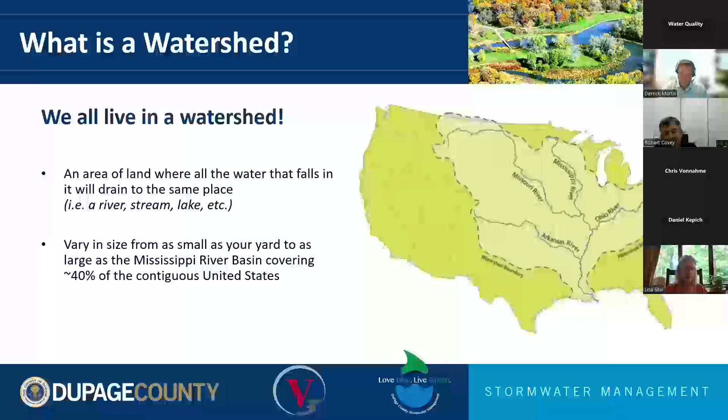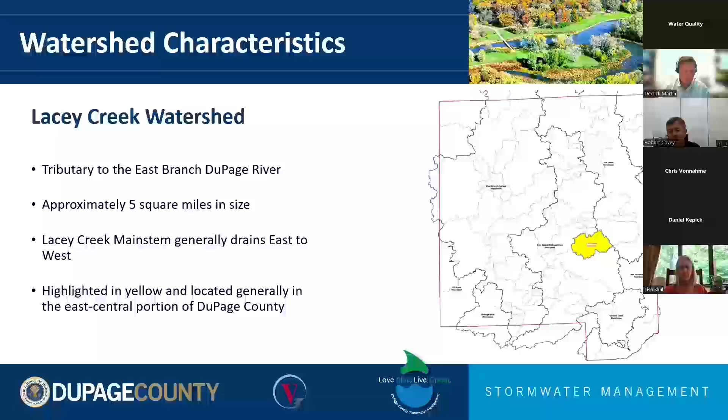The primary stakeholders for this watershed included the communities of Downers Grove, Lombard, and Oak Brook, as well as unincorporated DuPage County. Other stakeholders included the DuPage County Division of Transportation, the DuPage County Forest Preserve District, the Morton Arboretum, as well as Midwestern University. 2 stakeholder meetings were previously held with primary landowners as well as significant partners in the watershed planning process. The purpose of the stakeholder meetings was to gather data and fully understand any problem areas within the watershed and to collaborate on any proposed alternatives or solutions.

Similar to other watershed plans developed by our department, the goals of the watershed plan include the following: mitigate the effects of urbanization on stormwater drainage, reduce damages caused by flood events, maintain or improve water quality in the streams, protect the function of all wetland and floodplain areas. In total, watershed plans have been developed for over 70% of DuPage County. Our department has also developed water quality only watershed plans throughout the county, which have as their primary goal improving water quality and reducing impairments to our waterways.

The primary purpose of the Lacey Creek Watershed Plan is to define watershed issues and identify potential solutions that will reduce and prevent future flood damages. The Watershed Plan also seeks to engage the public and stakeholders, inventory the watershed resources and physical system, including drainageways, wetlands, riparian areas, recreation areas, and flood management facilities.

Identify flood problems. When identifying flood problems, it is important to note that our watershed plans do not look into and investigate flooding and drainage concerns on a micro scale or for one or two parcels only. The plan seeks to develop solutions that are of a larger scale and are regional in nature. The plan also seeks to formulate potential alternatives and solutions, develop an acceptable plan, and having an approved plan in place will allow DuPage County and other communities and entities to apply for various state and federal funding and grants to carry out any alternatives or solutions.

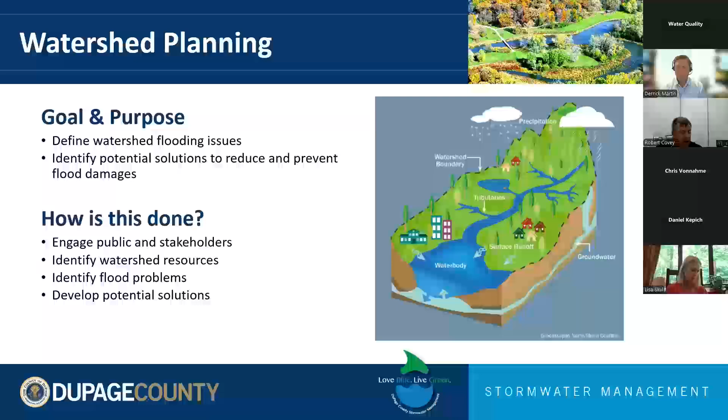DuPage County has been conducting regional hydrologic analysis for various county watersheds since the mid-1980s. A sophisticated continuous hydrologic model called HSPF was utilized to simulate the hydrologic characteristics of the Lacey Creek watershed. The model simulates continuous hourly runoff for precipitation and meteorologic data for both surface and subsurface runoff. Other features such as evapotranspiration, snow and ice melt, evaporation, and temperature are all modeled within HSPF.

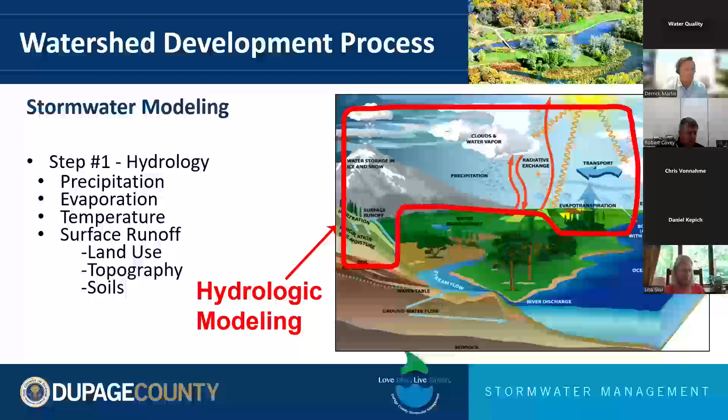Ultimately, the hydrologic model generates surface runoff for each individual rainfall event which occurred in DuPage County. The HSPF model generates runoff for a total of 184 unique rainfall events which have occurred over a period of 70 years.

The next step in our process is to model the existing hydraulics of the stream with a computer program. For Lacey Creek, the FEQ hydraulic computer model is used to compute flows and water surface elevations based on the hydrology generated by HSPF. The existing conditions FEQ model incorporated detailed survey information, which was obtained in 2009, as well as supplemented with additional survey data obtained in 2011, 2022, and 2023. There were also over 20 major hydraulic structures within the watershed, which were modeled in detail. Approximately 115 surveyed cross-sections were also incorporated into the existing conditions model.

Once the hydraulic model input is complete, the runoff generated for each of the 184 storm events is run through FEQ, where flows and elevations are calculated for each of the individual events. Ultimately, the existing conditions FEQ model was modified to analyze proposed alternatives within the watershed.

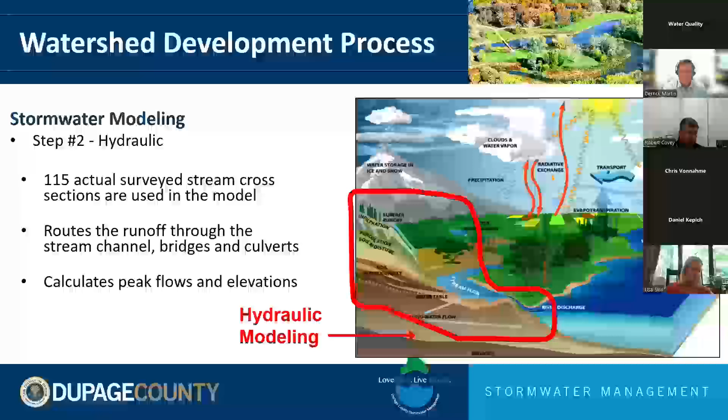Lastly, an economic model called DEC2 is used to compute flood damages for residential and commercial structures throughout the watershed. For Lacey Creek, we had low water entry elevations such as window wells or front doors from over 130 structures surveyed and incorporated into the DEC2 computer program. The economic model utilizes peak stream elevations, which were generated by FEQ, and damage curves, which are produced by FEMA, to determine flood damages at each structure along the stream corridor.

For each simulated flood event by the FEQ existing computer model, flood damages can be computed by the DEC2 model for each surveyed structure. All damages for all structures can then be summarized for all storm events simulated by the FEQ existing conditions model. For different projects and alternatives, a modified FEQ model can then generate new peak elevations, which can then be rerun through the DEC2 model. A comparison can then be made between the total existing damages and total damages from the proposed conditions to see what kind of benefit and flood damage reduction is being realized.

It is important to keep in mind that the economic model does not account for sanitary sewer backups, sump pump failures, or seepage through foundation cracks. It is, however, a useful tool to determine how well a proposed project or alternative might be performing to reduce flood damages and comparing various plan alternatives.

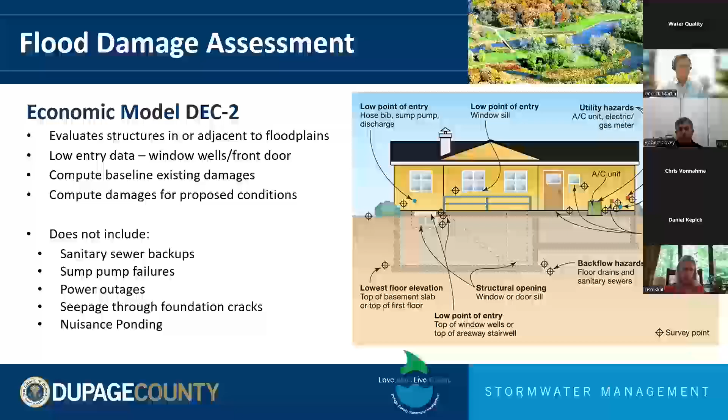Some other damages to be considered include associated damages and traffic damages. In the case of Lacey Creek, most of the damages resulting from flooding are in these two categories. Very few structures actually receive damages per the DEC2 model, but flood damages due to traffic delays, disruption, and detours have been significant. In the case of this watershed, the traffic delays not only affect area commuters, but also have a significant effect on critical facilities such as the Good Samaritan Hospital, the Downers Grove Fire Station number 3, and the Downers Grove Sanitary District Lift Station located just downstream of the tollway.

Now, Derrick Martin with V3 is going to take a deeper dive into the details of the watershed plan and the various projects and alternatives that were considered.

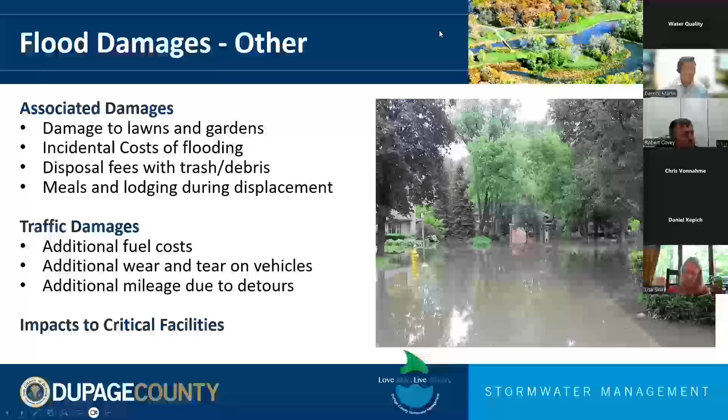All right, thank you, Rob. I'm going to share my screen here. Just want to confirm everybody can see my screen. Is that working? Yeah, we can see your presentation. Yep. Okay, very good. All right, thank you, Rob.

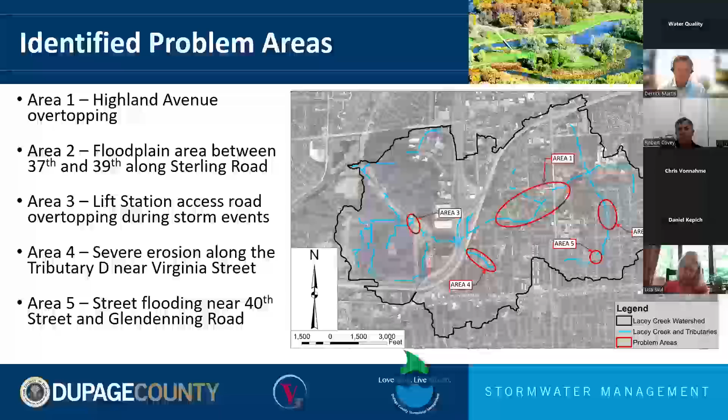Right. So problem area 1, the Highland Avenue overtopping. There's approximately 1,000 feet of Highland Avenue that can become flooded, and anywhere between a 10 and 100-year storm event, the extent of flooding varies, but at its peak is about 1,000 feet here. And as we discussed before, Highland Avenue is a primary access route to Advocate Good Samaritan Hospital from the north, which requires rerouting for those large storm events. So it's an access issue, and it's also an access issue for the Downers Grove Fire Department Station number 3.

And we'll talk about this during the alternatives, but this problem area is somewhat the result of some downstream constraints. A lot of times when you have a roadway that is underwater, people generally think, well, that culvert that goes under the roadway must be undersized. So water comes down, it hits the roadway, it stacks up because the culvert's too small, and it flows over top the roadway and then drops into the downstream channel and goes away. What we'll talk about in a little bit is that that's not really the case at Highland Avenue. There are bigger problems downstream that are contributing to this.

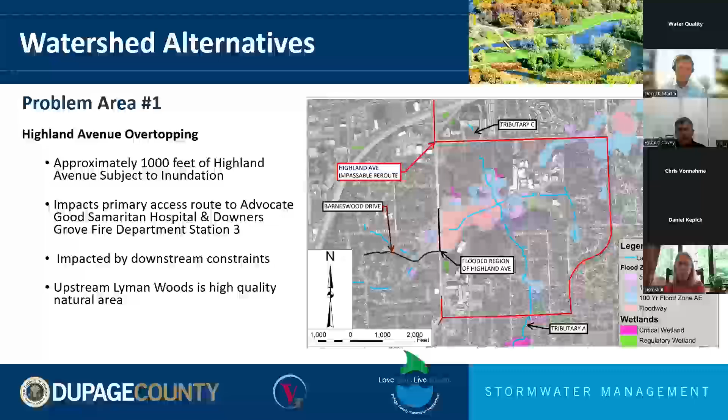So when we get into the alternatives for Highland Avenue, if this is Highland, we have Lacey Creek coming down, flowing east to west, and we wanted to see what we could do at Highland to solve this problem. One of the first things you would look at is maybe raising Highland Avenue up. To find a solution for roadway overtopping, it's either increase the amount of flow that's going to go under the road or raise the road up so that all the flow will go under the road.

And in this particular case, further downstream we show this green area at Barneswood where there's another culvert, and this green area where there's another culvert at Saratoga. And then we show a section of stream down here. Those are all contributing factors to what's happening here. So when we looked at the modeling for this particular area, we said, okay, let's increase the capacity underneath Highland and see if that will do anything.

And as it turns out, we could add 10 more culverts under Highland, but because of the downstream restrictions, this whole area at Highland is basically just acting like a level pool. And therefore, we can't just fix it. There's really no restriction coming underneath Highland. The restrictions are further downstream.

Problem area 2 is an area of flooding between 37th Street and 39th Street. And again, about 900 feet of Sterling Road becomes inundated in some significant storm events. There's some structural flooding in this area. And again, because the roadway is flooding and some of the depths of the flooding on the roadway, it impacts the access to residents, both to get to their house and emergency access.

So for problem area 2, the alternative, we focused on the modeling in this area because this is one of the areas of the model that we didn't have a lot of detail in the original model. So we provided more detail. We got more surveyed information and tried to understand a little bit better what was going on. We'd identified a culvert that was on the tributary that's a little north of where some of the flooding is down here to the south. And that culvert was restrictive.

So what I talked about before, as far as if you have a culvert that's restrictive, this is one of those cases that by providing a larger culvert, it would let more flow go through, which would help lower the flooding elevation on Sterling. As you would probably suspect, if you provide a bigger culvert, you're allowing more water to go through. And what we don't want to do is impact downstream property owners.

So there was a parcel here that the county already owned, and we looked at the opportunity of providing additional storage on here so that we would hold back some of the water, so that we wouldn't have to make this as big, or even if we increase that a little bit, it would knock down some of the flows that are coming to that culvert. We still ended up with small increases in downstream flows, and there are still some high water levels that remain in the channel, although they're in bank.

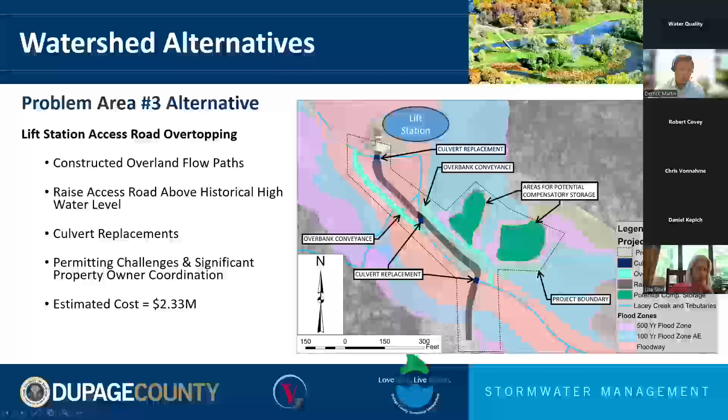So on to problem area 4. This is on Trib D down here off of 40th, and there's some severe erosion. This area was already identified in the East Branch water quality plan that Rob mentioned earlier, but erosion, as you may expect, kind of continues over time, changes, and so there was some concern that there are potential structural damages that could happen if this continues to erode, and there are utilities, electrical boxes, other things that are in side yard, rear yard easements that could be impacted by the erosion.

So this is more of a stream bank stabilization project. It does improve water quality, and it does potentially relieve flood damages. Sometimes, again, people think of erosion as a water quality issue, but if you have erosion, a big tree comes down, blocks your waterway, and then you have a storm event behind that, those two could kind of work together to create flooding problems as well.

So we looked at different bank stabilization measures. When you get close to a structure or utility, you might have to use more of a structural measure, something that can go vertically quick. In other areas, you could use more of a bioengineered measure, where maybe you lay back some banks, you use some native vegetation to help stabilize the banks. So again, this is consistent with what was presented in the East Branch Water Quality Plan. The estimated cost of this project is around $2 million.

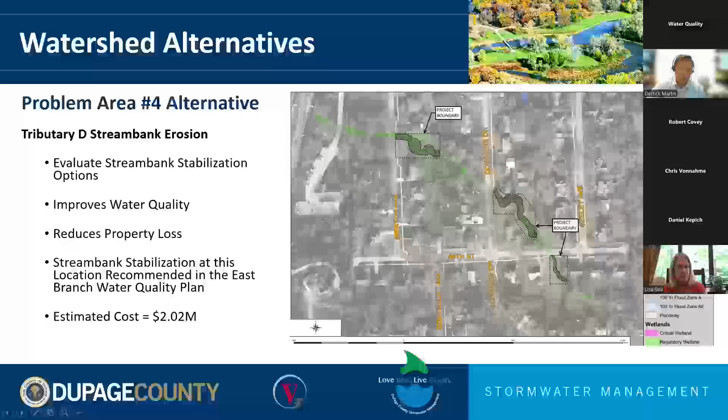All right, and then finally for problem area number 5, there's known flooding and has been for years at Glendenning Road and 40th down here. There's a large natural area around here, and this area ultimately drains north from Sterling Road. There's a storm sewer that runs north along Sterling Road that ultimately ties in to that other flooding problem that we talked about, problem area 2. And so we had looked at, could we provide a relief sewer down here that would help some of the flooding here, but wouldn't make the flooding worse to the north.

And so one of the things that we looked at was upsizing the 15-inch existing storm sewer on Sterling here to a 21-inch storm sewer, which is consistent with the storm sewer that's north of 39th. Now it does only provide minimal reduction, less than 3 inches, and there are some slight increases north.

So again, if this is something that rose to the level of a project that wanted to be implemented, we would have to make sure that the solution here was maybe combined with the solution to the north, or we would look at potential storage opportunities along here so that we could not make the problem to the north worse, which is part of the challenge when you're trying to fix flooding, because you either need to provide storage or you need to move water to a new location, and you don't want that water to create problems at that new location.

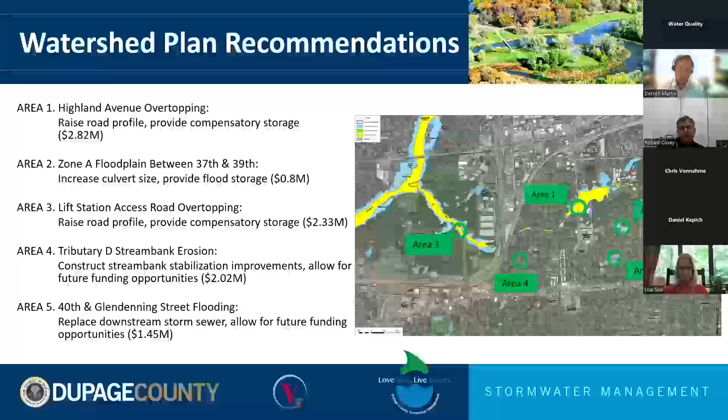Again, just want to reiterate what Rob said. That doesn't mean there aren't other localized flooding problems in the watershed. It doesn't mean that there aren't other localized water quality problems in the watershed, and those type of problems were included in the plan so that they would be eligible for funding. It usually helps to be in a watershed plan if you're trying to go after state or federal funding for different projects. So those were included in the plan. And so then I'll turn it back over to Rob and he can talk about the next steps.

All right, thanks, Derrick. Great job. Yeah, just summarizing some of our next steps now. The draft watershed plan was presented to our stormwater committee on September 3rd, and they moved to open what we're in now, a 30-day public comment period. That public comment period will end on October 3rd. Only formal comments submitted through our online portal or sent via mail, written directly to my attention in the department, will be part of the comment response document.

So if you do have further questions today, we certainly can talk about those and answer those questions or concerns, but they would not necessarily be made part of that formal comment response document unless we receive them in one of those two ways. Either, like I said, directly through our website, there's a button there below the draft plan, or actual written comments can be mailed directly to my attention.

Also, at the conclusion of the public comment period, we would then make any necessary modifications or corrections to the watershed plan. And then at that point, we would anticipate bringing both the final draft Lacey Creek Watershed Plan and the comment response document to our stormwater committee. And then with their approval, it would go to our county board. We anticipate that in November. You want to move on to the next slide, Derrick?

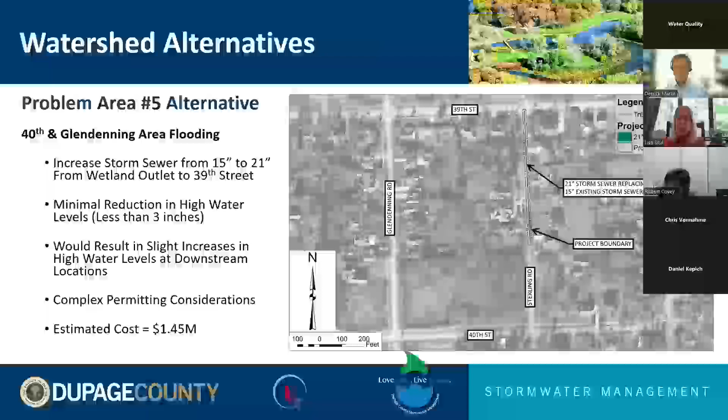Okay. I live on 3636 Sterling Road, and we just had that swale put in, I think it was about a year ago. That's on 38th, between 39th and 37th. I don't know if you've got the picture of it, because part of it was on your deck, not the one you just showed today, but before. Yeah, I think it's right over there, right in that area. But that hasn't been in place for very long. So I don't really know if you've gotten any results or seen how successful that project has been. Seems like you wouldn't want to spend $1 million until you've gotten a result from having already just done that.

Well, and Chris, you can correct me if I'm wrong on this, but the county did provide us with those drawings, and because it was built, that was already incorporated into the existing condition. So while it provided some benefit, it wasn't enough to eliminate the flooding in this area, at least based on the modeling results at the high level that we're looking at. So there's a limited amount of space there and a limited amount of storage. And I would agree with you. You might not have seen that yet because we probably haven't had a really big rain.

Yeah. I thought it was interesting that you were saying that there was water that goes over our street, which I've lived here for, I don't know, 12 years, and I've never seen water over that road ever. So it's just kind of weird. I don't really know if it's something that happened years and years ago. But I live downstream from there. And so the proposed culvert that you're considering putting in, the large one. So it's 18 inches now, and you would increase that to 36 inches. That would be quite a lot of additional volume of water.

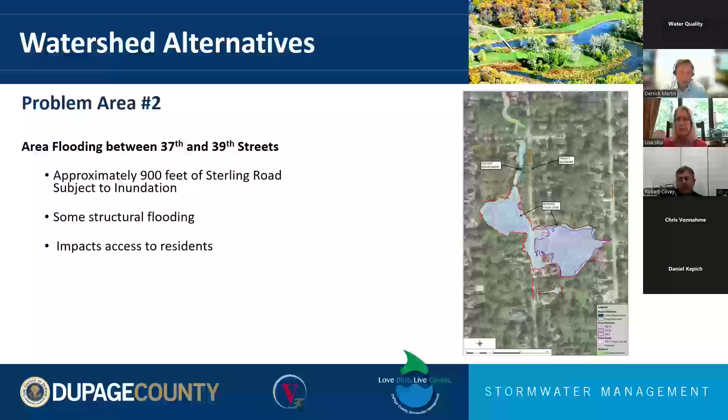Yeah, we definitely appreciate those comments. And just so you know, part of the reason why on this one we looked at the alternative is we were trying to provide storage to help offset that. But we understand even small increases from a regulatory perspective, especially in DuPage County, this would have to be refined in more detail to make sure that we're not adversely impacting downstream property owners. So we can't just, quote unquote, open the spigot and let it move downstream. Well, that's good to hear at least. Yeah, it's very heavily regulated so that we make sure that we're not impacting somebody. Well, just so you are aware, the last thing I'm going to say is there is a lot next door to us where I was explaining they had such bad flooding previously.

Right now there's condemned buildings on it, and it would be something, I don't know if you might consider as another spot where you could have a water containment area at that location, because it is further down. There's really only, I think, maybe about 3 more homes that would be impacted downstream prior to it going into Lyman Woods. Okay, that's very helpful.

Thank you. Sure. Yeah, we can certainly investigate that. And like Derrick said, it becomes kind of an iterative process. Maybe that culvert winds up not being 36, maybe it's a 30. Maybe we're able to gain some additional storage on this lot that the county owns, and try to balance that out. So we're making improvements, but we're meeting our ordinance requirements and not having any adverse impacts downstream, near where you live. Okay. Thank you.

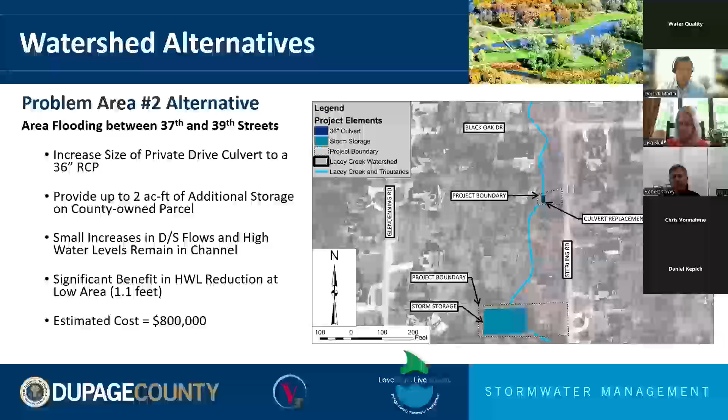Yes, you can. Okay, I also live on Sterling. I am in the area closer to 39th, so we are definitely affected. And we definitely have had water over the road by our home. We've lived here for 40 years, so I've been attending these meetings many times in the past. The only reason I even knew about this meeting is I arbitrarily found it on Nextdoor, which frankly, I was putting up something for sale, so I didn't even know about the meeting. How are you publicizing these meetings so that we can learn more about it?

And yes, we definitely need some help on Sterling Road. We have a new home that got put in next door to us, and we were told before, because it was an empty lot for many years, that there would be some drainage being done prior to a home being built. And as far as we could see, that did not happen.